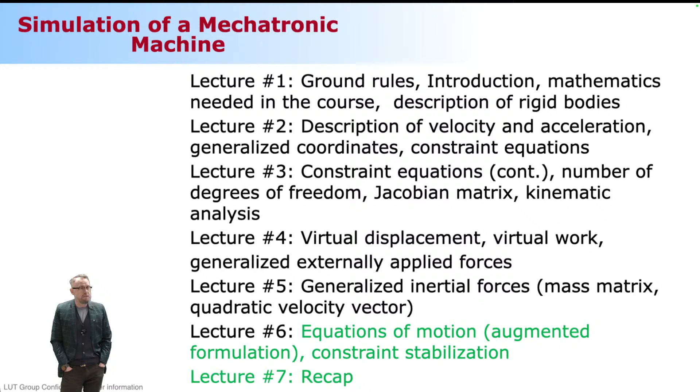But today, one more thing we need to discuss is constraint stabilization. It's related to the way the constraints are taken into account in the equations of motion. So that's what follows today. But prior to that, let's discuss a little bit what we discussed a week back.

A week ago, we discussed the concept of virtual work. The concept of virtual work is often misused because of what comes after the concept: this is a force multiplied by displacement, this time virtual displacement. This is usually misused because when you introduce the virtual displacement, this delta Q, you can set this equation equal to 0 only if your virtual displacements are kinematically admissible, meaning it needs to be a kinematically possible displacement.

The way I've expressed the virtual displacement here is that I introduce the virtual displacement to all my generalized coordinates, and I don't care about the constraints. That means this equation is not going to equal 0. That's simply because when you do so, the reaction forces due to the constraints will do a certain amount of work, and that amount of work is not accounted for here.

So the constraint forces or reaction forces due to the constraints are not accounted for. Let me repeat it: the concept of virtual work is often misused, because with that concept you can find an equilibrium. You can set this equation equal to 0 if your virtual displacement is expressed in a way that is kinematically admissible.

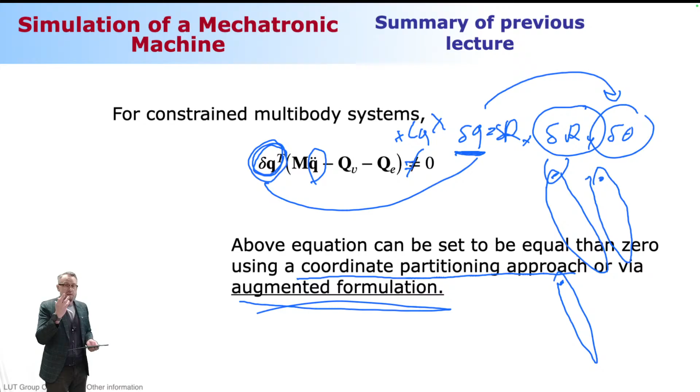What do we do then? This is very important: we are adding to the number of unknowns, because originally these are our unknowns, and in the case of the pendulum it's going to be 3 generalized coordinates, since every body needs 3 generalized coordinates. Then the other unknowns are the reaction forces.

Reaction forces will be equal to the number of independent constraints. Here, in the case of the pendulum, we need 2 constraints. So the number of unknowns will be 5, because the 3 generalized coordinates plus 2 constraint equations gives a total of 5. Makes sense? Makes sense.

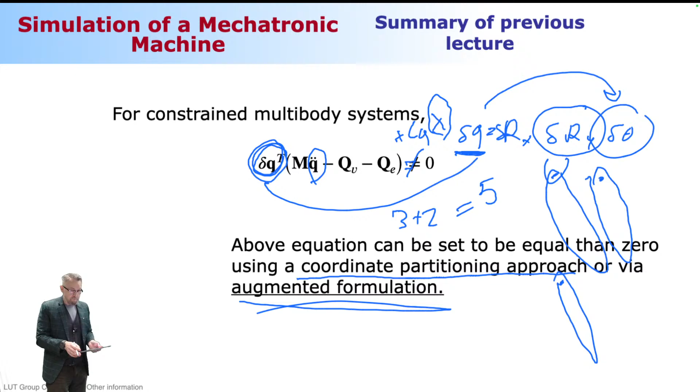Now, we concluded that this equation alone is not enough for us. Why is that not enough? Because this is an unknown and this is an unknown, and we only have this many equations. So we have too many unknowns versus the number of equations, meaning we need additional information.

And we get that additional information by taking the constraints into account. So now we have a matching number of unknowns and equations, and we're good to go.

Still, a little bit of a problem is that this system is called a system of differential algebraic equations, which can be integrated forward in time, but there aren't as many integration schemes available compared to ordinary differential equations. So what we do is take this constraint equation, differentiate it twice with respect to time, and substitute that into this equation.

Now we can express everything as an ordinary differential equation, and there are plenty of choices—Runge-Kutta fourth order, or whatever you want—to solve this forward in time. That's what we're aiming for.

And then we had this example, showing how the equation of motion finally looks. Just as a summary: this is the mass matrix, this is the Jacobian matrix, and this is the Jacobian transposed.

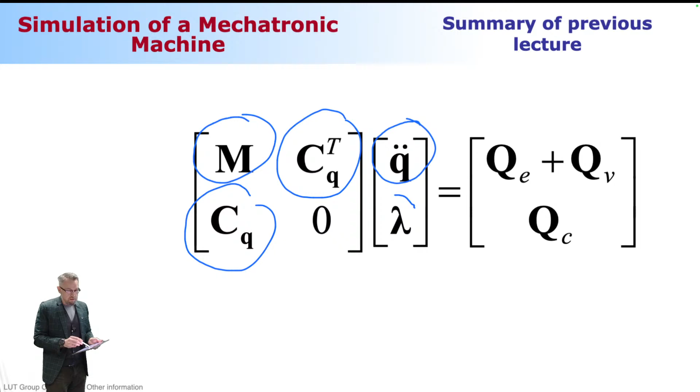This is an acceleration, reaction forces, which is Lagrange multipliers, generalized external applied forces, and the quadratic velocity vector, which is going to be equal to 0 if the body coordinate system is located in the center of mass, and the QC that came along when we differentiated constraints twice with respect to time.

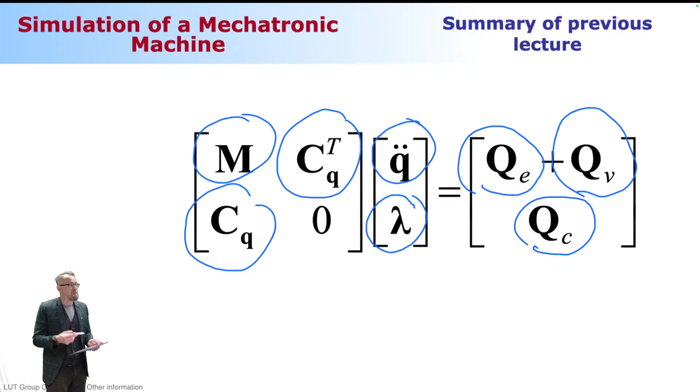Now, this was an example we looked at last week. This was kind of like a pendulum system, but at P there was a prismatic joint, and at Q there was a prismatic joint. The equation of motion looked like this. This is called the system matrix that needs to be inverted, and then it needs to be multiplied by forces, which is this vector here. I saw the response, but it was incorrect because I made some changes in my constraints, and it was actually a pendulum instead of a system like this.

Now I wanted to show you the fantastic animation that's going to get a great start for today's lecture, which is me solving the same problem using MATLAB.

Where is my MATLAB now? It's somewhere hidden behind. Hold on, I need to take this. Where is it? I don't want this. Where is my MATLAB? That's one window, but I need more than that. Where is it now? No, it's hidden somewhere in the back, very much in the back. I cannot find it at all. This was my browser. There it is, okay, so I'm going to put the camera back. It was this guy here.

So now the online participants can see us, and I'm going to solve this response like this. And it's done.

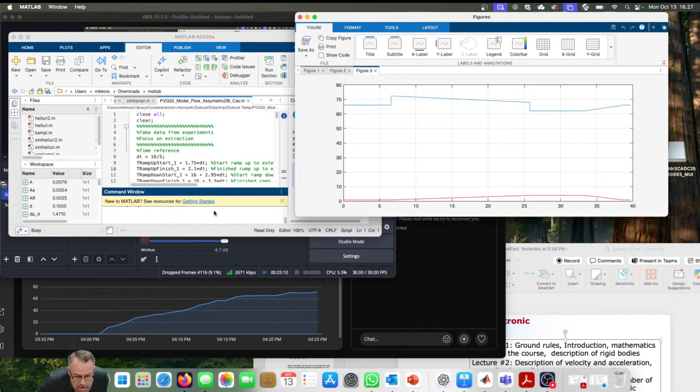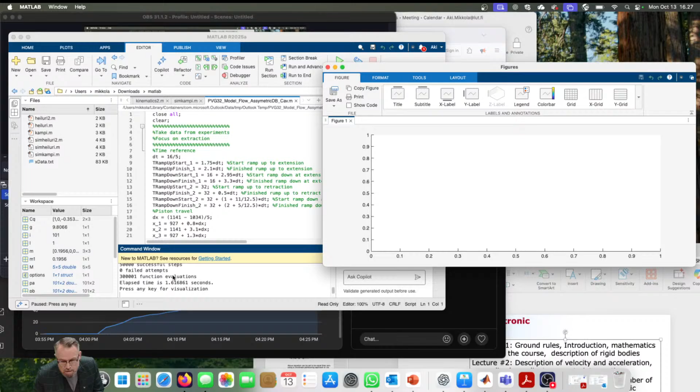What is this? Why is it that I cannot? What did I type here? Did I type this incorrectly or what? Look at that, so I mentioned this possible demo effect that I wasn't sure could be that bad. So where is the window that this response is hiding? Let me see. No, there is something off. There it is.

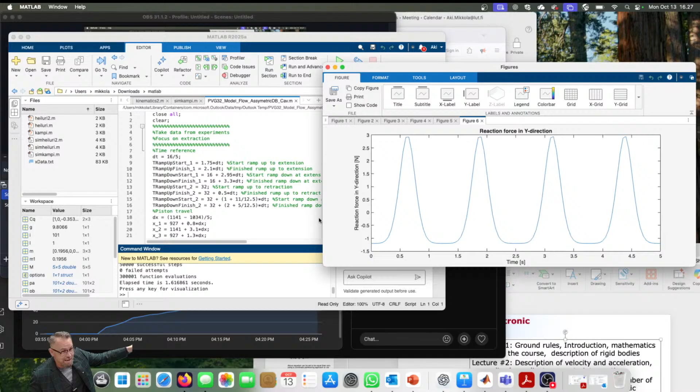Again, it is okay to get emotional, because this is one of those big deals in your life. Remember when you learned to do kinematic analysis, it was a big thing. Now what is this? Bigger, much bigger. So what we did here was solving the dynamic response. You might see a ridiculous beam-like body moving around and wonder what difference that makes in your life. I can tell you this: big difference. Because now you have the skills to create equations of motion for any kind of mechanical system, with much more than one moving body. You can have any number of bodies you want.

You can combine them any way you want with the help of constraints. How this goes in detail is something Alfonso promised to explain tomorrow. There's a guided tutorial, and he's going to show you how this eventually works, how you compute each of the components. We'll look at the equation of motion symbolically, and how you can convert this symbolic computing into numerical time integration forward in time. That's what you're going to learn tomorrow. Good.

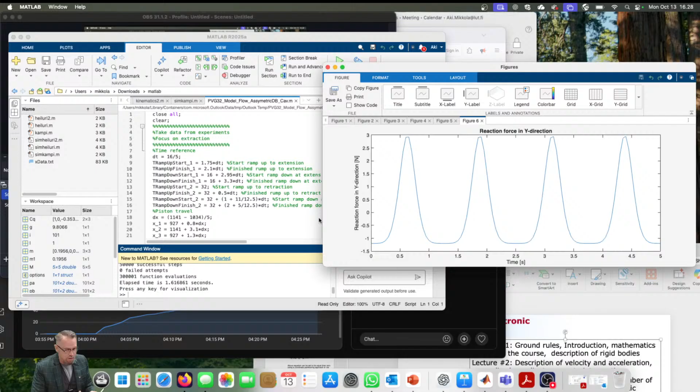So that's one of the highlights of this class, but there's going to be even more than that, because we're going to eventually add hydraulics to the system, since we need to know the forces imposed on the system. That's simply because, if I take myself back to Newton's second law, the external applied forces equal the inertial forces, and D'Alembert figured out that this can be written like this.

So now what we do with this equation, we're solving for r dot dot, which is basically like this, and then from r dot dot we solve for velocity and then position. Now what happens if you don't know the externally applied forces? What's the value of your response? No value, because it's just imaginary stuff, not related to reality.

So the latter part of my course will focus on this F component, and we're going to look at how this can be described using hydraulics. If we have time, we can take a look at how that can be described by other means of actuators, like electric drives and pneumatics.

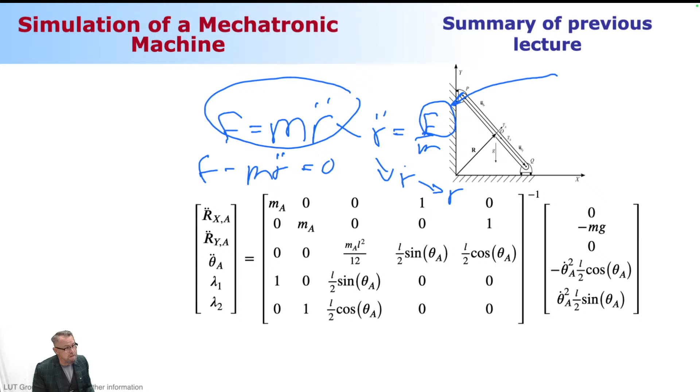Okay, so that follows a little later. But now, here's my first in-class quiz. This example consists of 2 moving bodies and 2 revolute joints, so it's a total of 2 revolute joints and 1 primitive joint. What's going to be the number of unknowns?

This is something you can try to solve using ChatGPT, and ChatGPT may provide okay answers in cases like that. I might try by myself. I have the professional ChatGPT, the paid version. I guess you guys don't have that - or do you? No? Okay, so I'm going to take my professional ChatGPT, take a picture of this, and ask what the correct answer is going to be.

Okay. What is the correct option?

Let me see what it's responding. I'm pretty sure it can make it correctly. Now let's see, let's analyze. So it's analyzing, figuring out that this is a planar linkage. Very good, it's really going good. So it's able to figure out there is a...

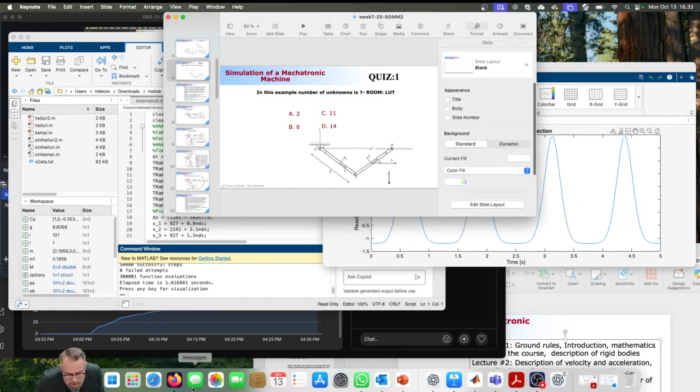Okay, so put your answer in - should we take a look at this immediately or a little after? You guys ready? Yeah, okay, let's take a look at this immediately. So this is my Socrative here, and we got 68. Okay, the number is increasing, 71 answers, 73.

And again, for online participants, ChatGPT is proposing that it's 6 - 6 generalized coordinates. Okay, 82. So are we done? Number is still coming up. This is really good news, because if this many people are following the summary lecture, it typically provides a very good outcome on the midterm exam.

So are we going to reach all the way up to 90? No, but close to that. The correct result - this is what we discussed a week ago - the correct result is 11.

So somebody was trusting that ChatGPT knows the way to go, and it was incorrect. And the funny thing is, it was willing to explain to me why it is 6 instead of 11 - makes no sense. Okay, all right, so, lesson learned.

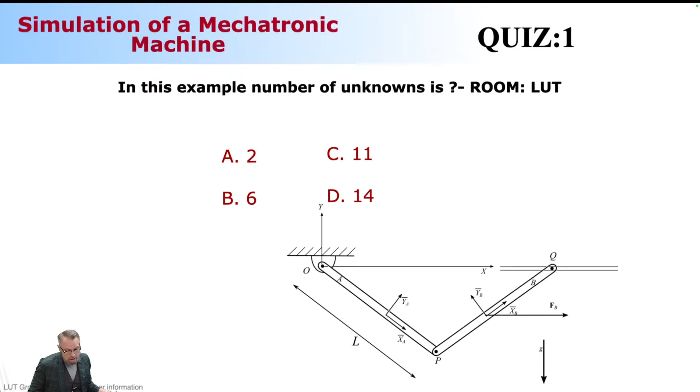You guys have bigger brains than ChatGPT. You need to trust yourself and make sure - it's fine to ask, like, what do you think, ChatGPT, what is the correct answer - but don't trust that. Think about it yourself, look at the next lecture notes, and make sure you have this math ready in these scripts. Okay, all right.

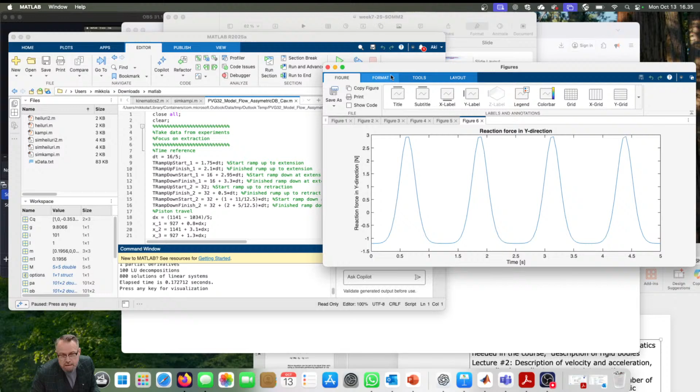Now, constraint stabilization - this was something I showed you a week ago, so let me take myself back to this one here. This is when we look at this crankshaft mechanism - let me take this away - so it looked like this. That's how it behaved, that's the correct behavior.

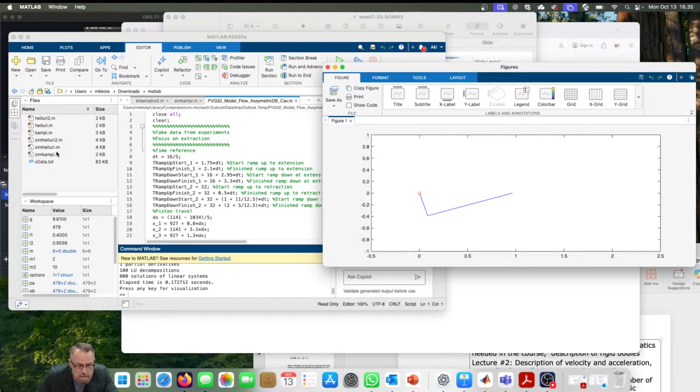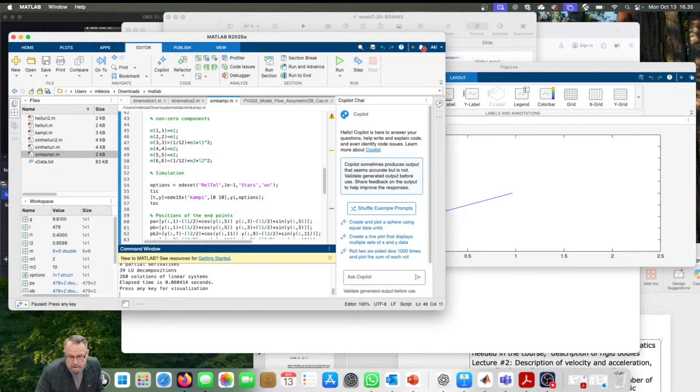But what I did in the very beginning was that my integration settings parameters were not set properly. And what happened was - now I need to take a look at this - I had an error tolerance that was really, really big. So I was saying I don't really care about the correct results, just compute me something. And that's what happened when I said that - just compute me something. And this is the response based on that.

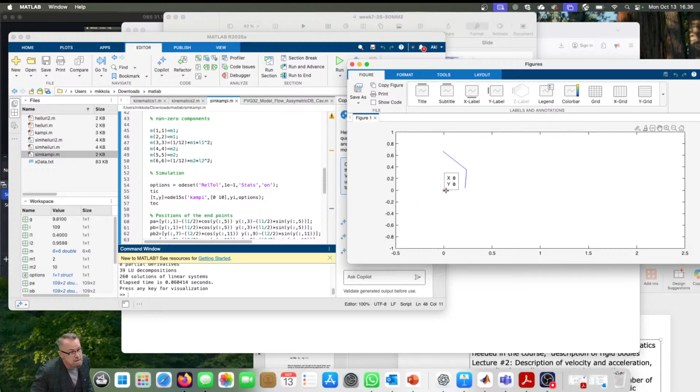What's happening here is that the constraints are no longer fulfilled. I'm seriously violating the constraint, because this end is supposed to be here, and it's not. It's not. So why is this happening? This is what I would like to explain to you next.

Why is this happening? This is happening because, remember when we were converting the differential algebraic equations to ordinary differential equations, we did this with help of constraints. To be more specific, we did this by differentiating the constraint twice with respect to time.

A physical interpretation of that is clear, because what we do is include the constraints at the velocity level in the equation of motion. Actually, in acceleration level, since it's c dot dot. Now what happens when we do this at the acceleration level is that we are integrating the velocity level, and when doing so, we might introduce a certain amount of integration errors.

Then when we come down to the position level, we make another set of integration errors, which typically accumulate. They keep on adding, so we're not able to get rid of these errors. When they accumulate, the system starts to violate the constraint. We need to do something about that, something we can do about where this is happening.

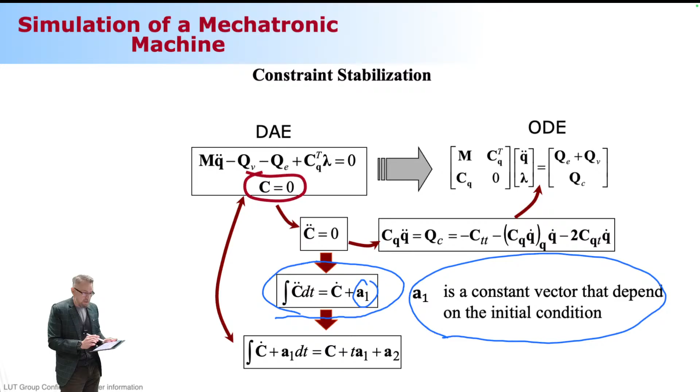Those of you that were paying attention to mathematics in high school, they explained this integration. When you're integrating from acceleration to velocity, there's going to be a constant value added to the solution. That constant value depends on the initial configuration, the initial condition. We don't take that into account, so we're just assuming that this is insignificant, equal to 0.

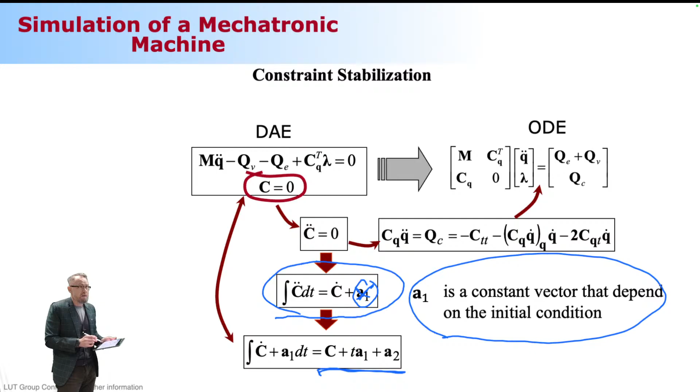The same happens when we go from velocity to position level. So we have two integration constants. This integration constant is never introduced into the equation of motion, and because of that, we're going to have quite a bit of possible errors.

We could get rid of this by making sure the integration tolerance is small enough, tight enough, that the error introduced each time we do this switching is going to be insignificant. That's one way to do it. Or we could alternatively take these constants into account. But each of these ways is not going to be very practical in reality.

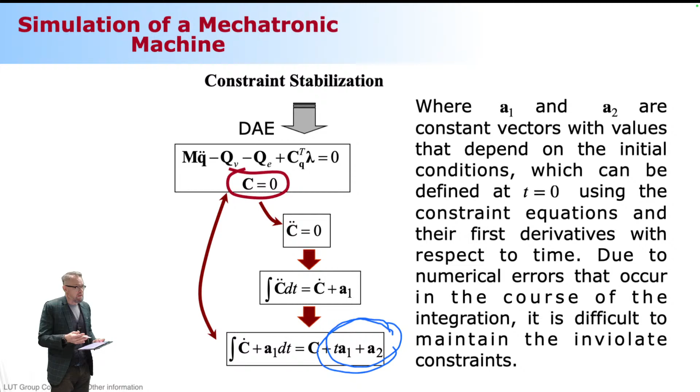And that's why there's something called constraint stabilization. Constraint stabilization is adding extra forces that are not because of reality, but just to make sure that we are not starting to violate the constraints. One of the most used ones is Baumgarte stabilization.

Now what we do in Baumgarte stabilization, it's going for the forces. It's one additional force that is added to the system, introduced in such a way that at the acceleration level there's no change, exactly like I introduced a little while back. But then at the position level, and actually the velocity level too, I'm adding constant values that are alpha and beta.

And they act like a spring and a damper. It works like this: let's take a look at this pendulum again. As soon as the pendulum starts to move, say in this direction, what comes into play is a spring and a damper, and they bring it back to where it was. Of course, the violation isn't going to be as big as I draw here, but it takes it back. The spring force brings it back where it was, and the damper makes sure that when it does so, it doesn't start to vibrate, but just does the motion back to where it's supposed to be.

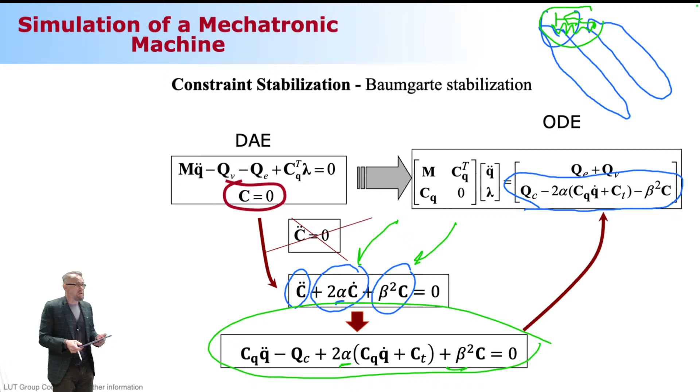How does that sound? Pretty good, I would say. Yeah, why not, this makes sense. Okay, and that was the last thing I would like you to be aware of prior to the midterm exam.

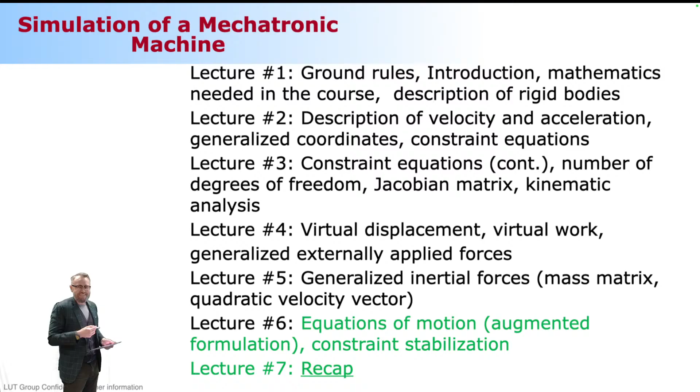If you still want an encore, I can explain the multi-body system dynamics to you in 10 minutes, max. But you need to clap your hands seriously to make me do that, like in a rock concert, because I make this ready encore. But it's up to you guys, so we'll see how it's going to go.

All right, recap - these are the subject matters, the things that I'm expecting you to know. And I know that you're busy, traveling with your 400 euro car, and you cannot focus too much on the midterm exam, so you need to find shortcuts. Why not? So I have a shortcut for you.

The shortcut is this: each one of these subject matters is rated by stars. Higher number of stars, the more important it is. So please get started with the ones that are highly rated and forget about the rest, because I know you're busy, and some of you might not consider this a very important course, and you're happy to score one out of 5 as a final grading. Fine, then just focus on the ones that are highly rated and leave the rest with no attention at all. You can try to guess the correct answer with help of ChatGPT, or you can try to read that from a lecture note. Those are the 2 possibilities.

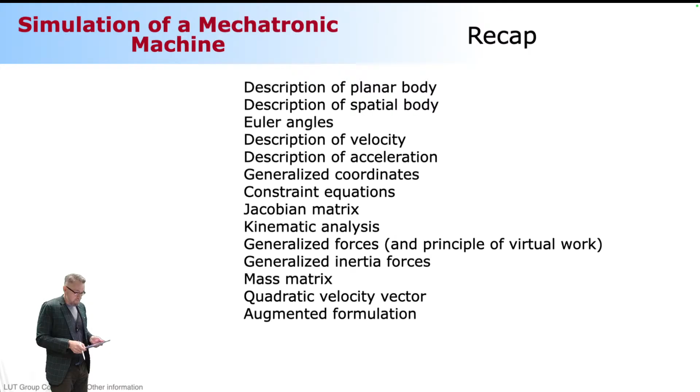Description of planar body - that's going to be the same rating as hotels. A 5-star hotel is the best you can find, there is no better than that. This is a 5-star hotel, so it's really fancy, very, very nice. So it's the best.

Description of planar body, this is how it goes. We discussed that in this class, particles and bodies will be described with help of the body reference coordinate system. The body reference coordinate system is attached to the body, rigidly attached. So if the body translates, so does the body reference coordinate system. And if the body rotates, the same happens to the body reference coordinate system. Now, because of this kinematic notation, we're going to have 2 components.

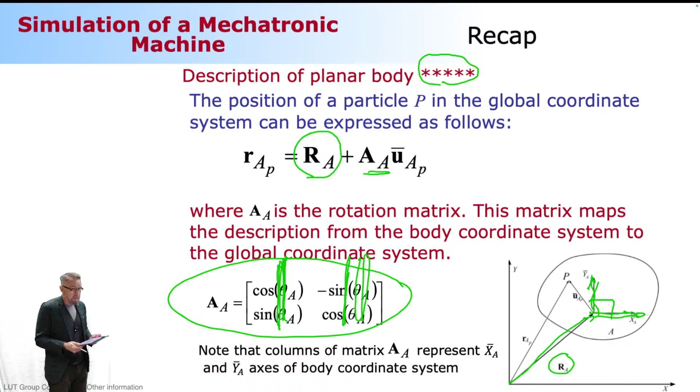The one describing the translation of the body reference coordinate system, which is this guy here. And then we have the rotation of the body reference coordinate system with respect to the global coordinate system. Rotation will be described by a 2x2 matrix, where the columns of the matrix describe the axes of the body reference coordinate system. These 2 vectors are orthogonal and perpendicular, meaning there's a 90 degree angle between them. They are also unit in length, which is the case for the body coordinate axis. Okay, that's the first thing to know.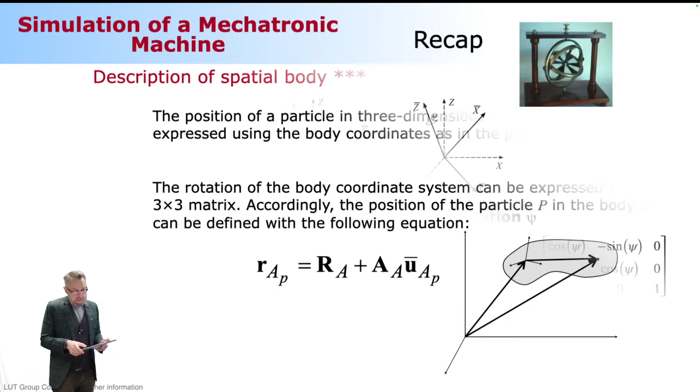We discussed one way to describe the 3x3 rotation matrix, and that way was based on Euler angles. For your information, one of the most used methods is quaternions, which is based on 4 parameters and 1 constraint. This is typically found in each computer software dealing with rotations. Computer games, that some of you might have tested, their visualization is actually based on quaternions, not Euler angles.

Okay, Euler angles work such that we have 3 successive rotations, one rotation after another - that's what successive means in this case. The first rotation takes place around the z coordinate axis and is an amount of phi. What is this, phi? I forgot this already. But you can read it by yourself, so I don't need to repeat that. So that's going to be the first rotation.

The second rotation will take place around the once-rotated coordinate axis x, and that amount of rotation is theta. Then we have the twice-rotated coordinate system, and then we're going to introduce a rotation around the z coordinate axis, this time psi.

Yeah, that's what I say, psi. So that's going to be the third one. And now we have a rotation describing each one of these rotations and how we can get the final one by multiplying them together.

Whatever you do for a midterm exam, please do not memorize any of this kind of stuff. That's going to be a big waste of time and energy. We'll never ever ask anything like that. We just don't.

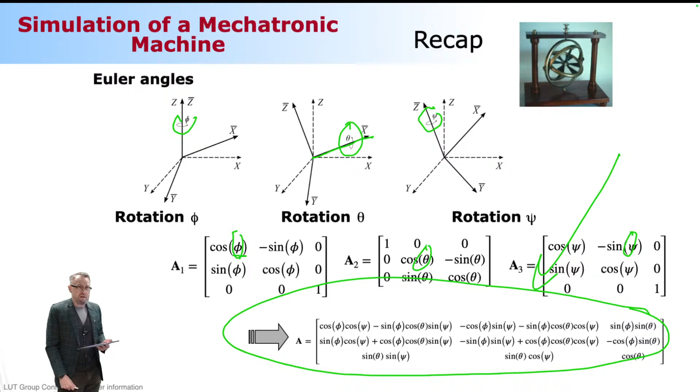All right, velocity, okay, that's a 2-star hotel. So it's okay, there's a breakfast available, but not the greatest one. And the bed is okay, so you can sleep overnight, but not the greatest.

The velocity consists of 2 components: translational velocity and angular velocity. This one was the one that rotation was added 90 degrees angle, and that's how you can get that from your original rotation matrix.

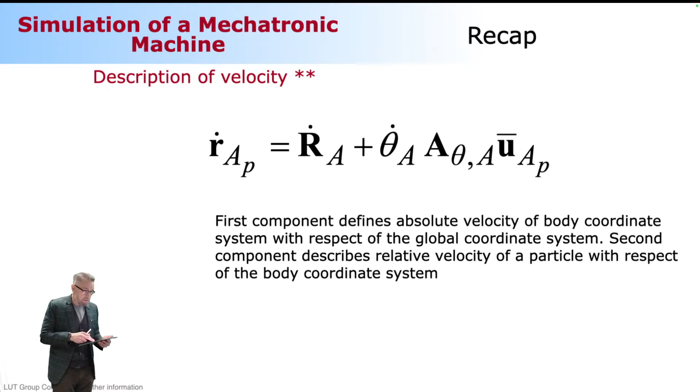Acceleration, also the same thing, so it's going to be a 2-star hotel, not too important. It consists of 3 components: translational acceleration, then a component that is quadratically related to velocities and angular velocities, more specifically the normal acceleration component, and then the tangential acceleration component due to the rotation. These two are due to the rotation. And that's how the acceleration looks like.

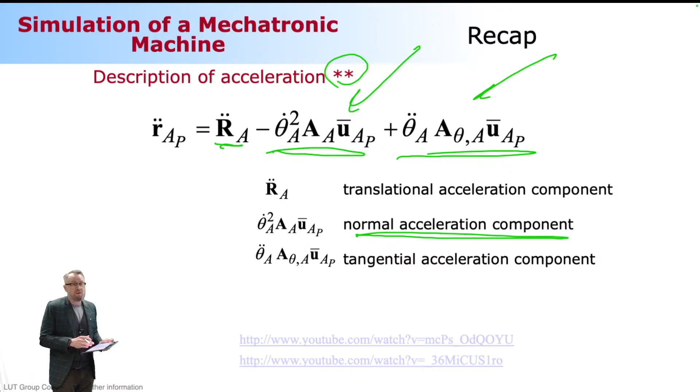Again, if you are busy like you are, I know you guys are busy, so forget about this. Don't focus on that. Okay, generalized coordinates.

That's obviously one of the good hotels. So like this city, Lappeenranta, the best hotel you can find is a 4-star hotel. So this is it, it really makes sense to look at this. Generalized coordinates comes from this equation that is describing the kinematics.

Now what you need to do is identify the variables. The variables are components of this vector. In a planar case, it consists of 2 components, Rx and Ry, and then the component associated to the rotation matrix, that is angle theta.

Vector U bar consists of U bar X, U bar Y components, but they are not variables. They are constant numbers, constant vectors, because we are assuming the body to be rigid. So the vector U bar cannot change as a function of time.

So this is a vector of generalized coordinates, and we discussed what everybody needs. More than love, we need 3 generalized coordinates.

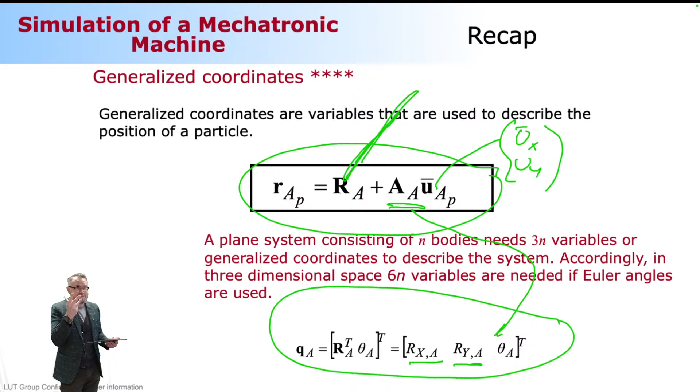So that's it, we continue with the high quality hotels. The next one is constraint equations. Constraint equations are the equations that are limiting the motion possibilities.

Make sure that you're practicing this. Make sure that you have scripts ready for different scenarios in cases like this, and pay a lot of attention to where the body reference coordinate axes are pointing to. That's very, very important, because we see a lot of mistakes where you are not looking carefully at the coordinate axes. Sometimes it can be surprising, like there could be a beam-like body where the y is pointing in the direction of the body, and x is pointing in the transverse direction.

So now I'm going to leave this to your responsibility to make a close look at each of the cases. Take that really closely. Ask your friend ChatGPT where the axes are located if you are not able to figure out by yourself, I think ChatGPT can do that if nothing else. And then be very careful when you're setting up the vector U-bar, because this is where you can make a lot of mistakes. And then we have here another concept, the number of degrees of freedom.

So we have 3 different scenarios. We have the dynamic system, where the number of degrees of freedom is more than 0 - 1, 2, and so on and so forth, and that's going to be a dynamically driven system, so you have to create the equation of motion to solve the responses.

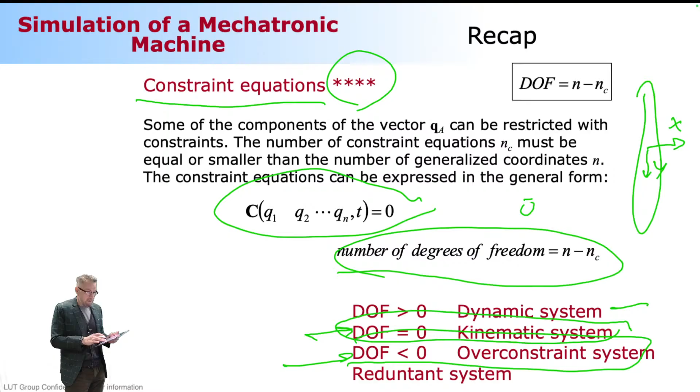It could be a kinematically driven system, kinematic system, where the number of degrees of freedom is equal to 0, and you can solve the responses using constraint equations only, nothing but constraint equations. And the redundant system or overconstraint system is something where the number of degrees of freedom is less than 0. Redundant is something where the constraints are not independent.

Have you ever guys been in a hotel like this?

What is in Dubai? Is it so that in Dubai they have a hotel with more than 5 stars? How many stars do they have? 7. That's nothing. So in Burj Khalifa they have a 7-star hotel. Yeah, but look what we have here. So we have here 2, 4, 6, 12. Burj Khalifa, only 7. That's ridiculous. That's nothing. That's absolutely nothing.

So we have here the hotel that is better than ever before on this planet, planet Earth. So you're going to see something completely different here. And that's a hotel with 12 stars.

Okay, what's the deal with this? Jacobian matrix. Now, be very careful with this. Make sure you have a script ready. Make sure that you know how to create the constraint equations. Make sure you understand that everybody needs 3 generalized coordinates, and then that's everybody. So if you have 2 bodies, it's going to be 6 generalized coordinates, and so forth. And then do the differentiation automatically.

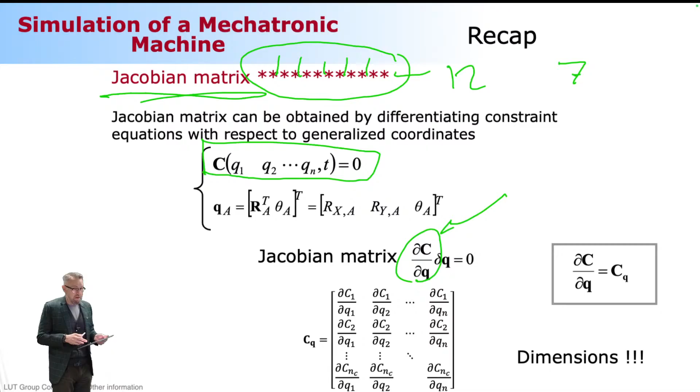Don't try to do it by yourself with a pen and paper, because for sure you're going to forget what's going to happen when you differentiate the sine theta or something else. It's very prone to errors. So don't do it by yourself. Of course, you can go anywhere you want, but it's highly recommended you use the help of a symbolic math tool - not ChatGPT, but a symbolic math tool. I'm not sure if ChatGPT can make a mistake in cases like this. That's a little bit unclear. I have never tested it.

Okay, back to Lappeenranta. So we have a 4-star hotel again. So we have kinematic analysis. Kinematic analysis consists of 3 steps. First, we're going to solve the position level analysis, which is an iterative procedure.

So we're solving something that is called the Newton difference. The Newton difference is not the solution, but it's a direction for how to update our generalized coordinates to get a better estimate about the solution. You keep on doing this until you get close to the final destination, which you can evaluate based on how big the Newton difference is.

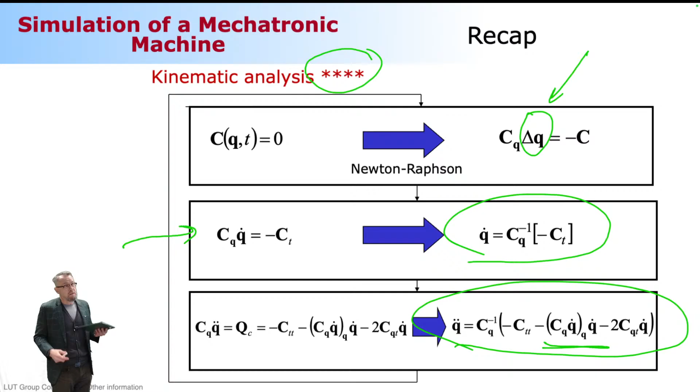Once it becomes small, you're reaching your final destination. Velocity level is nothing but substitution. Acceleration is nothing but substitution too, but there are a little bit of extra components involved. But that's okay.

Generalized forces, we become a 3-star hotel, which is okay. So the concept was like this: we start with the concept of virtual work. Virtual work, like any other work, is a dot product of forces and displacement - the displacement in the direction of the force. This is our force, this is the displacement. We did this because in the case of virtual displacement, we are assuming that time is not running. When time is not running, we can express this delta R with the help of delta Q.

And that's what we were aiming for. The whole concept about virtual work was nothing but finding the relation between global coordinates and generalized coordinates. This relation is the partial operation matrix obtained by using partial R, partial Q. That's what we're aiming for. And when you use this mapping matrix, you can express your force in terms of generalized coordinates.

Originally, your force vector - let's say the gravity force - consists of 2 components. Once you do this magic mapping, it will have 3 components. Why? Because everybody needs 3 generalized coordinates and the corresponding number of forces: external applied forces and inertial forces. You just cannot mix these things. You cannot. All right, so that's it.

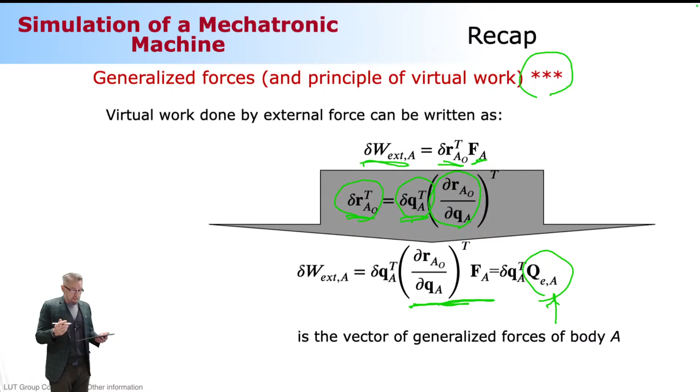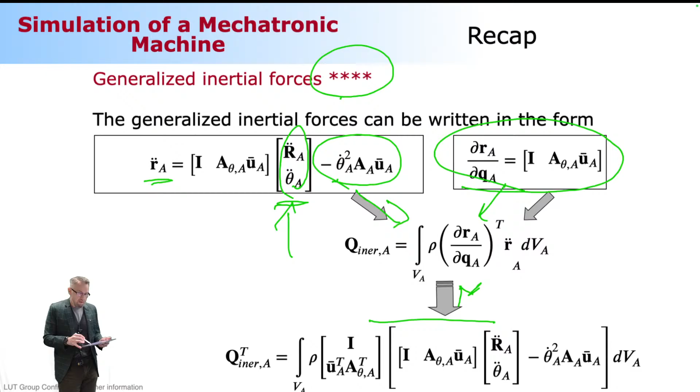And then comes this big nightmare about how you do the same, but for inertial forces. Same story, so it's somewhat important. First, you express your acceleration in such a way that you clearly differentiate the generalized coordinates acceleration here, and this is the one that is quadratically related to angular velocities. This was the mapping matrix, and when you substitute them all, you get the generalized inertial forces. The generalized inertial forces consist of 2 components: mass multiplied by acceleration, and the quadratic velocity vector.

This is how the mass matrix looks. So it's a 3-star hotel, consisting of 3 different components. The one located in the upper left corner is going to be an identity matrix - or rather a diagonal matrix, where the diagonal components are the mass of the body. These are related to Rx and Ry generalized coordinates, translations. So it makes sense. Then the one located in the lower right corner is related to orientation and angle theta only, and it's going to be the mass moment of inertia - how much the body resists rotation, inertia-wise. And then the off-diagonal component related to translation is going to be equal to 0 if the body reference coordinate system is located at the center of mass.

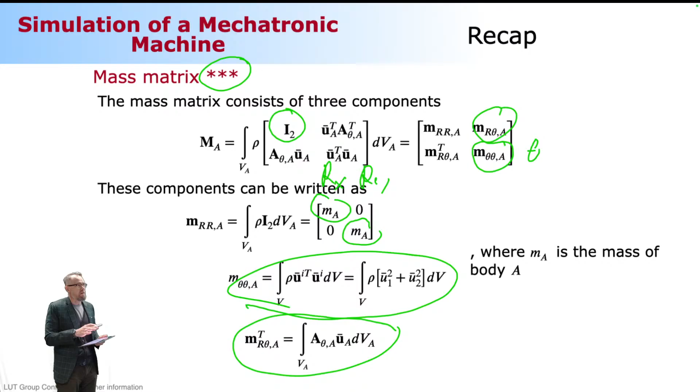The quadratic velocity vector is like how much the body reference coordinate system feels the rotation, force-wise. It's like centrifugal forces imposed on the body reference coordinate system. If the body reference coordinate system is located at the center of mass, it feels nothing. If it is at another end, it feels an amount that is quadratically related to angular velocities. Makes sense?

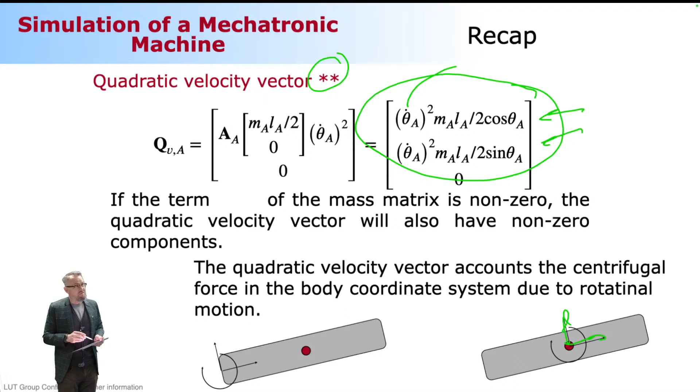But... 2-star hotel. I don't know, I guess it makes sense to skip this.

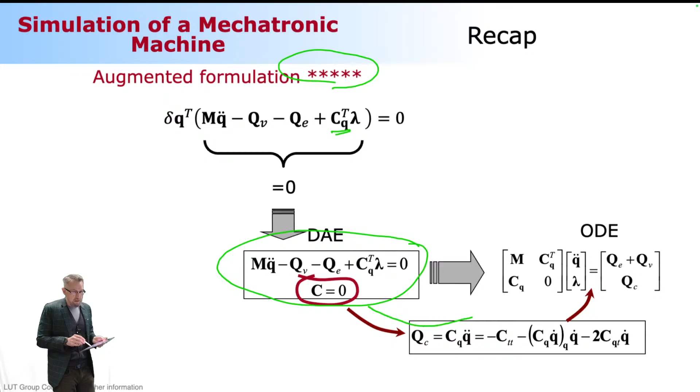The augmented formulation brings us back to the best of the best, the 5-star hotel concept. We added the constraints to the original equation with the help of Lagrange multipliers, and that all happened with the help of the Jacobian matrix. Then, taking the constraints into account, we converted the whole system into an ordinary differential equation. That's the whole story, and this is how it goes.

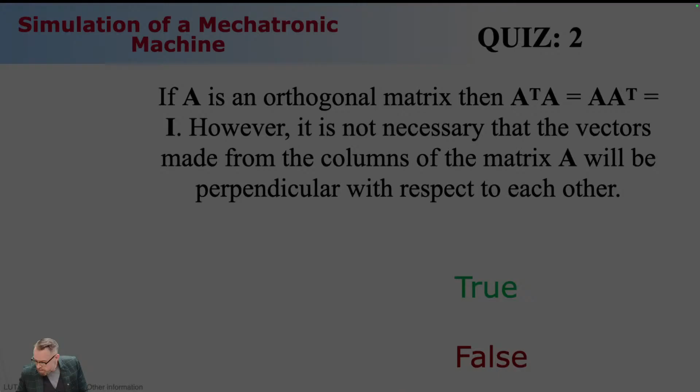Let me take a picture of this and use ChatGPT. I'm pretty sure ChatGPT can do this all correctly. Okay, ChatGPT, what do you say? What is the correct answer?

And the answer is... what is the correct option? ChatGPT is thinking. This is not... huh.

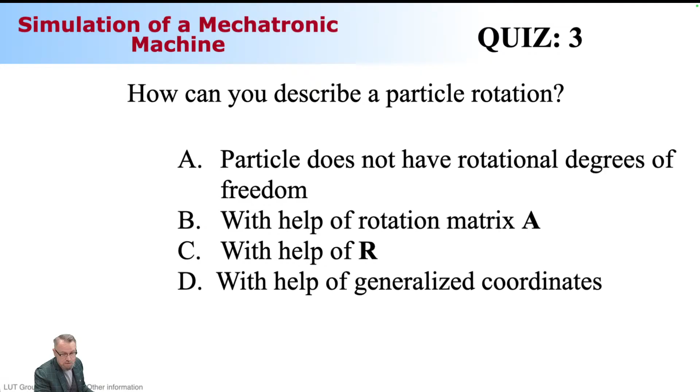Some very, very surprising explanations. I'll read it to you once we're done with this. Okay, you guys, what do you think is the correct answer? What do you guys say? We got 52, 54 answers so far.

60, 70, alright. Now, like I said, the Prime Minister of Finland was walking in a corridor just before we started the lecture. I think he would be very proud of you guys if you score 100%. Maybe we can call him back to take a look and shake each of your hands.

Hey, good job guys. So what do you guys say is the correct answer? Are we going to 80, 84 answers, 85? Okay.

Let me read what ChatGPT is telling us. Correct answer: A, particle does not have a rotational degrees of freedom. Interesting.

Okay guys, please trust ChatGPT. Whatever ChatGPT is saying, that's the way to go. Here it went correctly, and it says the explanation was absolutely correct: a particle does not have a rotational degrees of freedom.

Explanation: a particle in mechanics is treated as a point mass. It has position but no orientation. Look at that - way to go, ChatGPT. Therefore it cannot rotate or possess a rotational degrees of freedom.